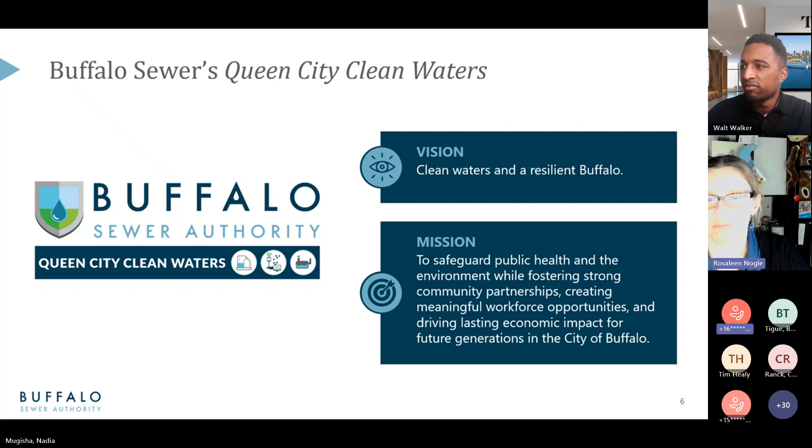Just trying to really state what we're trying to do here, rather than using the very technical term of long-term control plan, which the public does not exactly understand or embrace. And so we're looking at over $1 billion of investment over roughly the next 15 years. Our final project, currently we're looking at a regulatory deadline of December 31st, 2040.

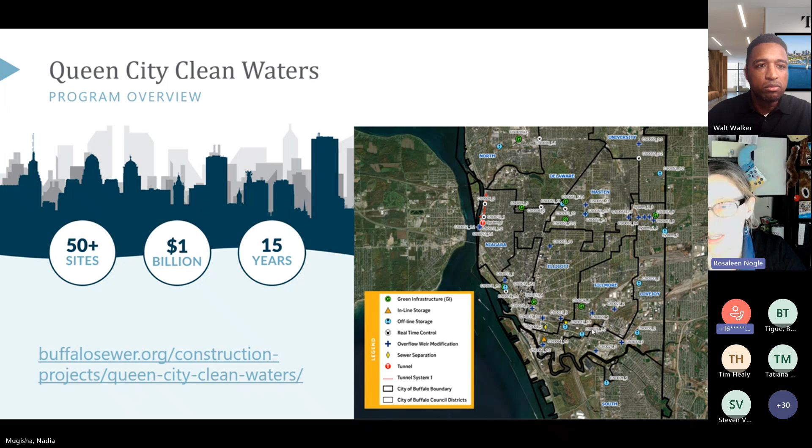And we're looking at a little over 50 sites throughout the city of Buffalo, and that includes 3 projects at the Bird Island Treatment Plant that are currently in various states of construction and design. But as for this presentation today, really what we're looking at is 2 of 10 underground storage facilities. And with that.

Okay. Thank you, Rosie. So now we're going to get into the discussion of the specific items related to scope. First, want to cover just some key dates as it relates to the procurement schedule. So signed and sealed submissions must be received no later than Tuesday, March 4th, before 10 a.m. Those hard copy submissions must be delivered to Rosaleen Nogle at Buffalo Sewer Authority's office at City Hall. This timeline also includes the digital PDF submission of the proposal, and the technical proposal and cost proposal must be delivered for the hard copies in separate sealed envelopes.

Shortly afterwards, interviews with shortlisted consultants will occur, estimated the week of March 24th. Consultant award at the Buffalo Sewer May board meeting will occur. Target notice to proceed is July of 2025.

As these 2 projects, Sidney Lark and Edison Martha, are part of the Queen City Clean Waters long-term control plan, and a hard consent decree schedule, maintaining and getting ahead of the design schedule is of extreme importance. And so the completions of the designs are outlined here for Sidney and Lark, no later than March 19th, 2027, and Edison Martha OLS no later than November 20th. So just to reiterate, these are consent decree projects, and schedule is extremely critical.

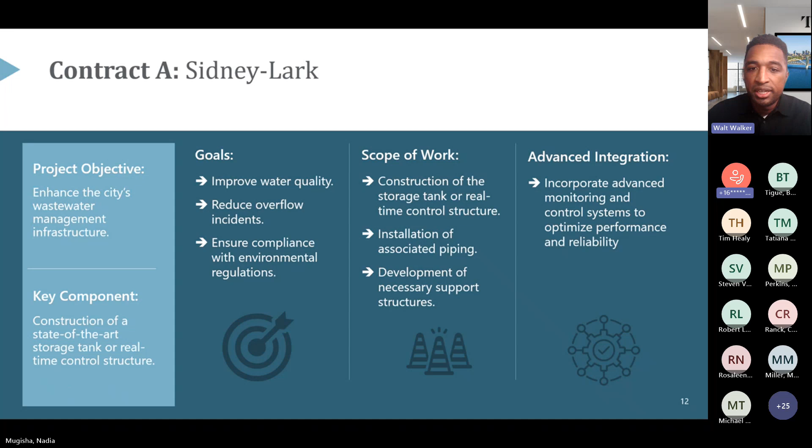And real-time controls technology has been used in projects across the city of Buffalo for Buffalo Sewer over the past decade, many of which are currently under construction. So in the Sidney Lark project overview, I will turn it over to Nick from the program management team. Thanks, Walt. Appreciate that intro. Welcome everybody.

So here I'll go ahead and talk about Sidney Lark OLS, alternative one, and we'll get into why there's multiple alternatives here in a minute. But here you can see the image on the right is of the Sidney Lark project area in blue. You see the outline of the tank there. The footages have changed slightly since this image was created, as well as the tank volumes for the initial PER, as we got into 30% design. We can talk more about that. So yeah, location here, northwest corner of Sidney Street and Lark.

This concrete offline storage tank is going to hold approximately 1 million gallons of sewage volume here. That volume had dropped slightly from the initial PER when we got into 30% and started doing some detailed modeling. You could see the 5 parcels in blue are the city-owned Buffalo properties, and we've also got a couple other properties to the south and east that are owned by the City of Buffalo that we're going to utilize for temporary storage for laydown area there.

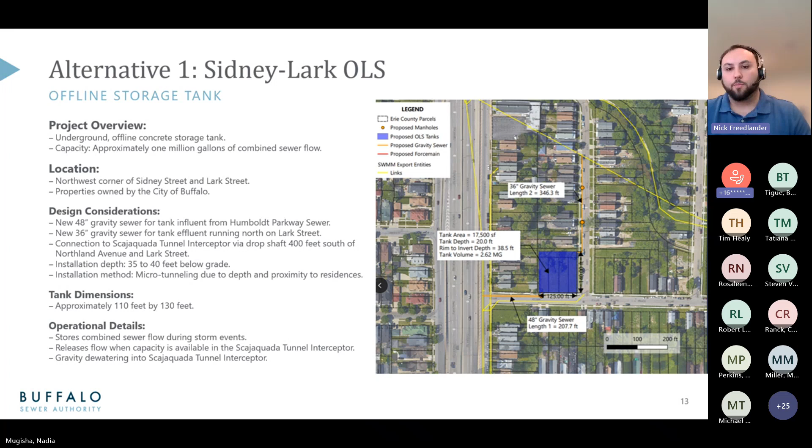You can see the 125 by 140 on the image to the right. When we got into the constructability review, the extents of that were a little too much, so we had to pull back the tank to 110 by 130 and increase the depth there. So just some operational details. This tank will store combined flow during rain events. Once the capacity in the Scajaquada tunnel interceptor is available, there's a gate that will modulate and allow flow to leave the tank. So again, gravity dewatering is extremely important to BSA, and that's what we've prescribed here.

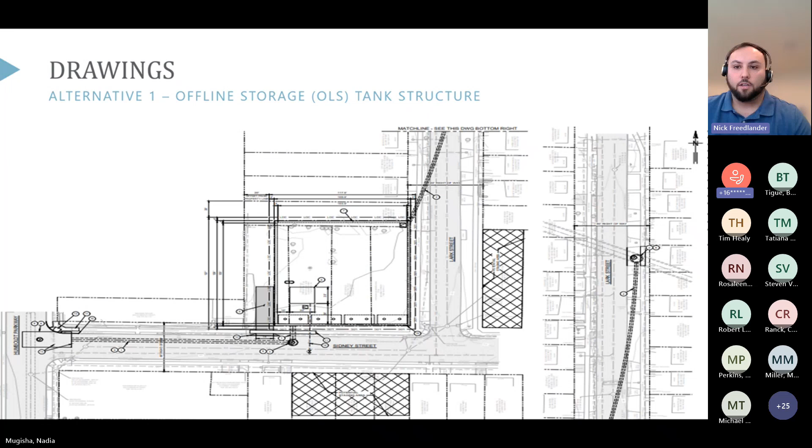So I'm actually going to just go ahead and share my screen in PDF so everyone can see this clearly. So here is the site plan for alternative 1. Here is the diversion chamber. As mentioned, we are getting into the curb and sidewalk a little bit here. So replacement of the sidewalk and curb, as well as pavement restoration along the influent. Here we're going to have a manhole to turn 90 degrees into the tank.

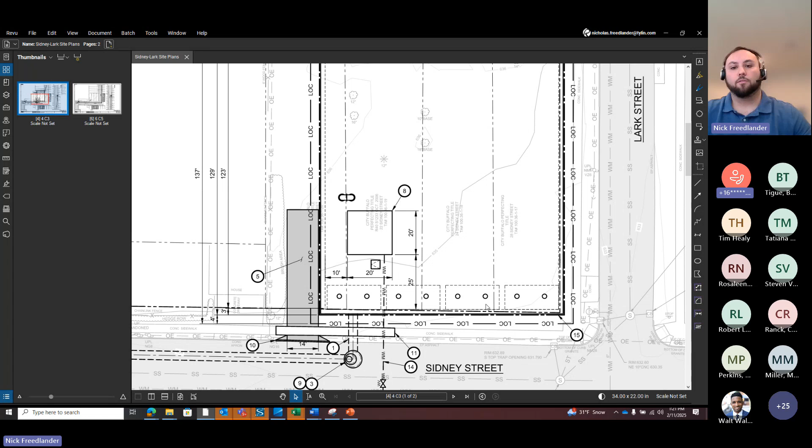An important feature of these tanks is the flushing, the tipping buckets here. So we've got 4 runways with 4 sets of tipping buckets here, where these will also be removable concrete slabs. So you're going to be able to one day, if needed, pull out the tipping buckets for maintenance activities. Here is shown a small utility building that will house the electrical equipment, as well as the water lines to supply the tipping buckets. Here we've shown a temporary access, and here the construction entrance.

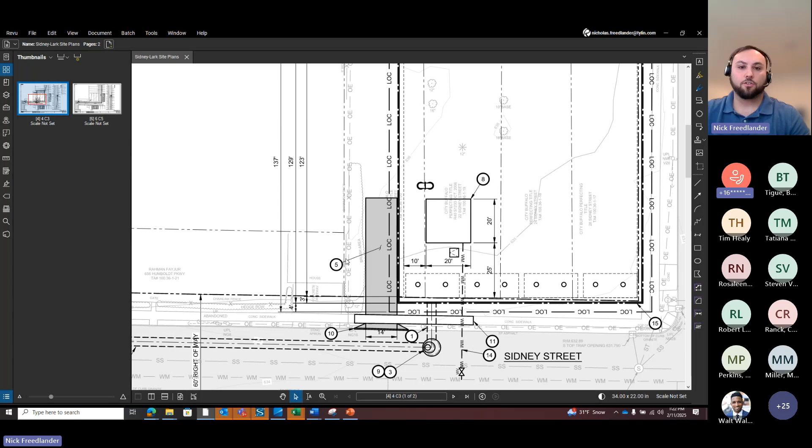And just an important thing to note in this site is we are in the middle of a neighborhood. So as I said before, the extents of the constructability of the tank were definitely top of mind here. There's a small garage structure. In fact, the neighbor up in here has actually been using this lot as a back driveway. So that neighbor might be a little unhappy with us here, but I don't think he's supposed to be using that as a driveway nonetheless.

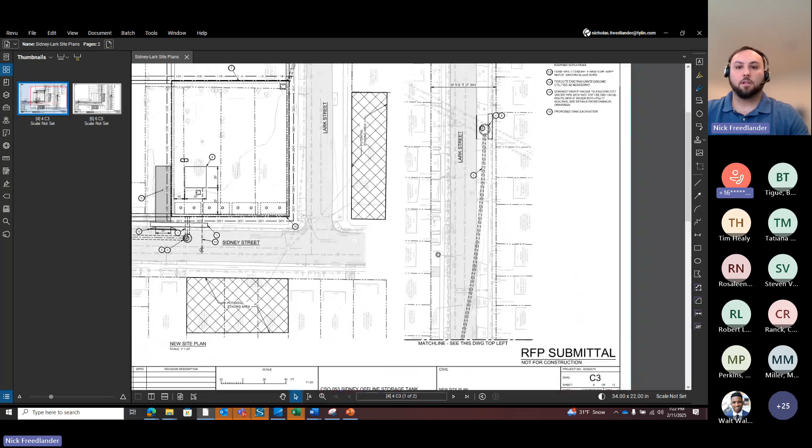And then leaving the tank in the northeast corner here is where we've prescribed the micro tunneling operation, and that comes here about 400 feet to the south of Northland Avenue. And here we've prescribed a vortex style drop shaft to get down to the Scajaquada tunnel interceptor. Nadia, you can take the screen back for the next slide.

So some design considerations. This was essentially an update from the PER to the 30% design. We reduced the volume of the tank from 3.26 million gallons to 0.85 million gallons due to the detailed hydraulic modeling that occurred between the PER and 30% stage. Peak flow rates are 75 million gallons in the 48-inch conduit, and 42 million gallon capacity out of the effluent 36-inch line. The tank dimensions optimized here are exactly 123 by 103.5.

Obviously this would need to be looked at as detailed design progresses. The tipping bucket design, we've got 4 tipping buckets as I discussed, each with the capacity of 1,460 gallons. And these buckets have been coordinated with the manufacturers to ensure that there would be adequate flushing in the flushways.

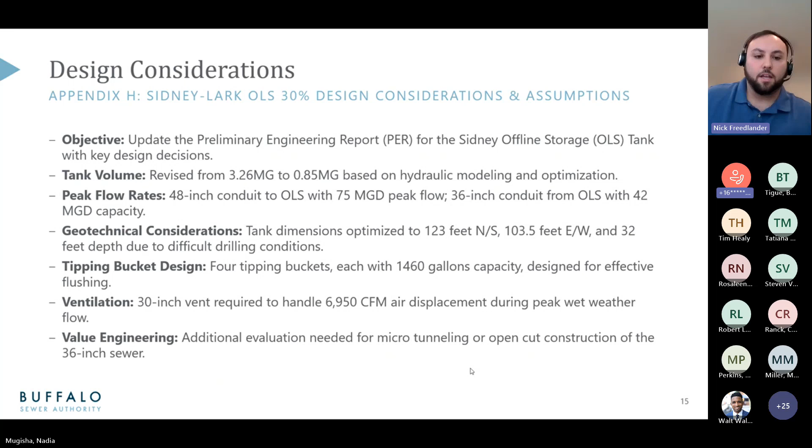Ventilation is definitely top of mind for BSA on this project, considering the proximity to the neighbors, the residents here in this neighborhood. So we're looking at a 30-inch vent to handle about 7,000 CFM of air displacement during peak wet weather. And obviously that would need to be looked at further as detailed design progressed. And then value engineering, any additional evaluation for micro tunneling versus open cut of the 36-inch sewer would be necessary once the detailed design is finalized and we know how deep we're actually going here.

So you can move to the next slide. So moving into alternative 2. As I discussed, there was an effort to update the modeling, rerun some scenarios, and that's how we came down to our about 1 million gallon storage volume for the OLS structure. And during this evaluation,

essentially on the 5th largest storm of the year, this structure was only being used as a pass-through, as an interconnect. So we kind of took a step back and said, hey, do we really need to build this massive tank if the 5th largest event is really not storing much of any volume? It's just using it as an interconnection. There may not be a need for a tank. So we created alternative 2, looking at a real-time control structure.

So this alternative would include the diversion chamber as previously discussed. However, the modulating gate that was within the OLS structure will now be placed in that diversion chamber, and that will act as our real-time control structure. And coordination with SCADA and remote monitoring will be required there. So the location is the same.

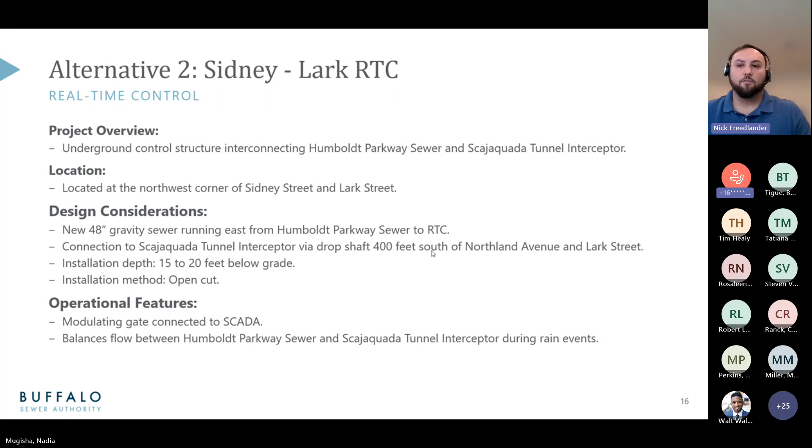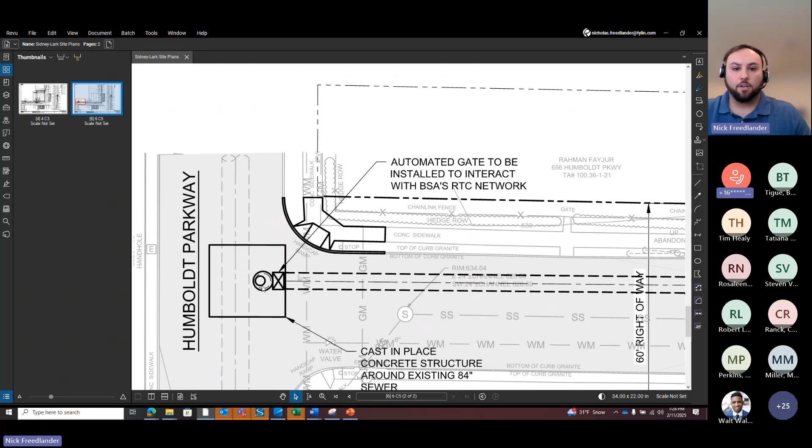And again, I'll just steal the screen so everyone can see this clearly. So here's alternative 2 site plan. Again, very similar to alternative 1. We're having the diversion chamber here with our new modulating gate that will be connected to SCADA. And then our 48-inch sewer will, instead of taking a 90 here in Sidney, be coming to the intersection of Sidney and Lark and running north to that drop shaft structure.

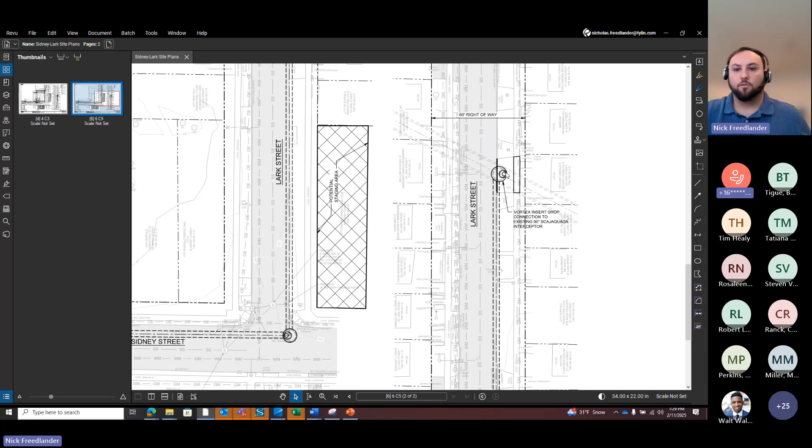Here's that small control panel that I mentioned previously. Here again, no building required, just a small outdoor panel there. Same open cut installation here on this side and back to the vortex style drop shaft here.

So one thing really to consider here is we got an extension for our regulatory date based on some of these changes. So we are developing the 30% submittal for alternative 2. We wanted to provide something for the proposers to take a look at to get an idea of what we were thinking for alternative 2. But we are progressing with updating our 30% design to show alternative 2, the more detailed drawings as you'll find for alternative 1 provided in the RFP.

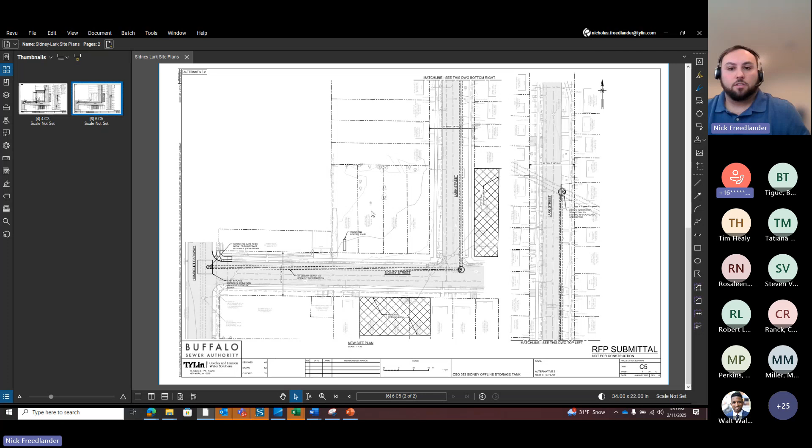We are coordinating with DEC to update the PER and provide the updated information and answer their questions as it relates to alternative 2. So essentially, this is why we are still showing 2 alternatives versus just saying, hey, just the RTC. We still need to confirm that the regulators are in agreement with this alternative as we progress and update the PER. And all of this information will be shared ultimately with the awarded consultant for negotiations. Nadia, you can steal the screen back and move on to the next slide.

So here's a project schedule. As the RFP currently stands, these dates are a little different from the RFP. You can see the big one here is the March 2027 final construction documents. The schedules for Edison, Martha, and Sidney were very similar before we began negotiations with alternative 2 with DEC. So we'd certainly love to share that timeline, that extension, with the ultimately awarded consultant to provide documents about 4 months later than Edison Martha, here on the 19th of March.

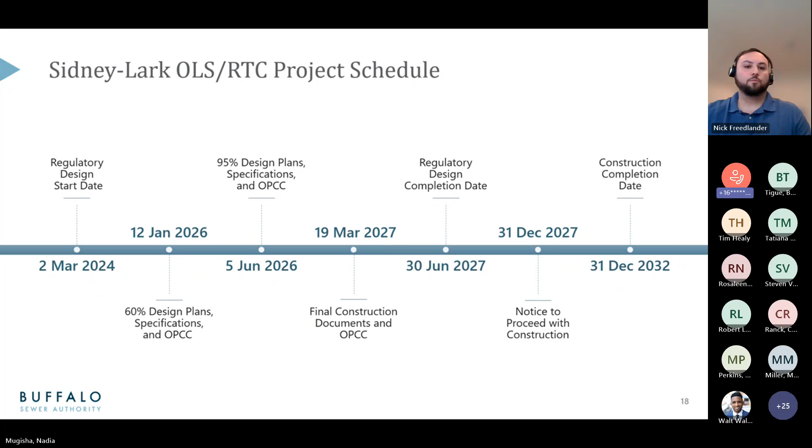And just important to note that the regulatory date is June 30th, 2027, with the notice to proceed for construction in December 2027, and then ultimately a construction complete date by December 31st, 2032. That's it for Sidney. Steve, you can go ahead and take over for Edison Martha.

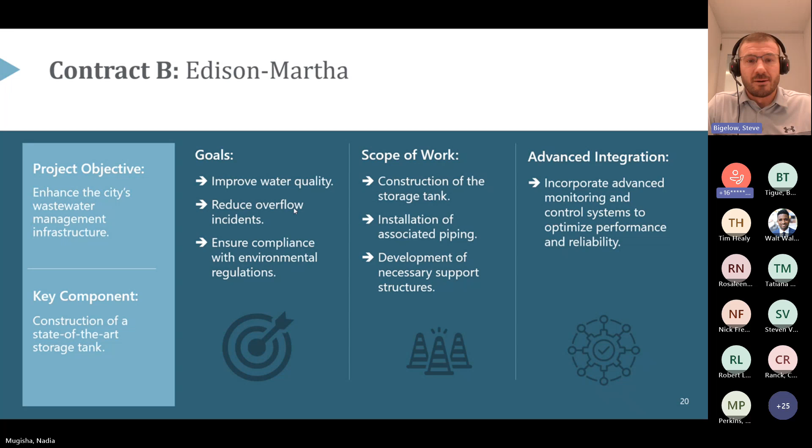Yeah, thanks, Nick. I think a lot of the OLS tank items that Nick has talked about are pretty repetitive between Edison and Martha. I think maybe the primary one being gravity in, gravity out. I think laying out this design without a pump station was a goal from the get-go, and I think from the Sewer Authority for long-term O&M.

For Edison Martha, we have a 48-inch gravity inlet sewer coming off the Scajaquada Interceptor and Edison Avenue, gravity into the site through the parking lot there of the charter school, a 2.61 million gallon offline storage tank in the eastern portion of the park, 8-foot depth, and then a 24-inch gravity sewer on the effluent side back to Edison Avenue.

The design considerations, I think, for this, from a high level, are minimizing the footprint there in the park, but also gravity in, gravity out. We've had some ongoing coordination with the Sewer Authority. I think we'll get to later in the slide deck some of those design considerations to minimize the impact of nearby facilities, below grade access points, and then specifically, as I move on, what the Parks Department has communicated to us.

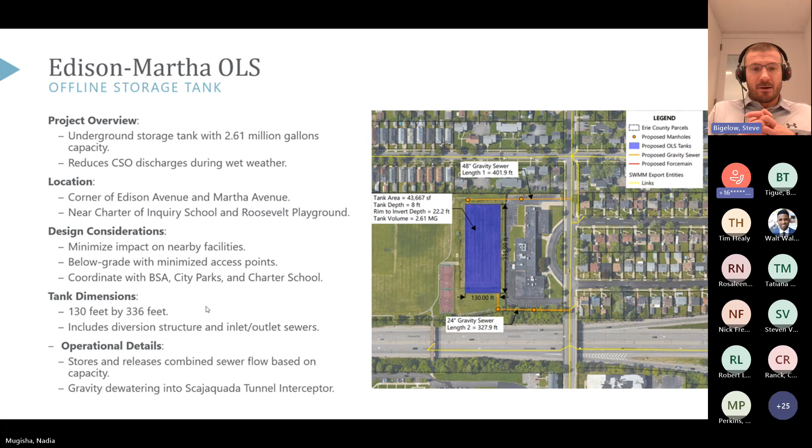I think maybe we moved on. I think actually, Nadia, I might take over and share, similarly as Nick did with the drawing package, to just communicate this a little bit since we've been working on it with the Parks Department. Access drive we have shown off of the school parking lot. Our diversion structures in Edison Avenue. And then what we've been working on with the Parks Department and what you're seeing here from a high level overview is their conceptual plan that they are working on for Roosevelt Park improvements.

A lot of what we've been doing for the Edison Martha OLS tank is minimizing above ground features in the park. So where our design started was a multi-cell OLS tank to try to minimize parts of the basin being activated. We had some hatches in the open field. The community feedback has been that they would like that to be open, no hatches, aligning any hatches we have with pathways or access drives. So a lot of our coordination for the last few months has been trying to get the design to a point where we're adhering to what we're hearing from the parks.

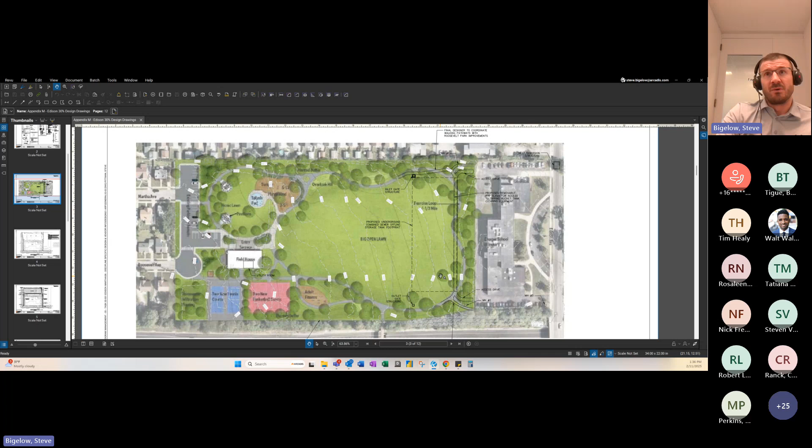I think that's all I have, Nadia. I can let you take over sharing again. Maybe go to design considerations.

Thanks. Yes, the objective, I think, is fairly straightforward as we're on the call. We have submitted our PER responses to the DEC, so that process is well underway. The main differences between Sidney Lark and Edison Martha is really coordination with the parks and the charter school. The parks has Roosevelt Park upgrades slated for this year and next year that we're working around to minimize our footprint on what they build.

And then the charter school really, once the park upgrades are completed, will be utilized for getting the effluent lines through their parking lots and also for haul roads. So there'll be some logistics there to work out with the charter school. Storage tank, 130 feet by 336. Screening was deemed unnecessary earlier on in the process. Tipping buckets for cleaning, as I said. We've been collaborating with Grande on those.

I think there's a memo in the RFP for flushing for what we've been working on with the sewer authority, as well as the geotechnical report. There's some rock in the area. We're anticipating rock excavation, but nothing too terrible, I don't think. It's actually better than we initially thought from the soil borings.

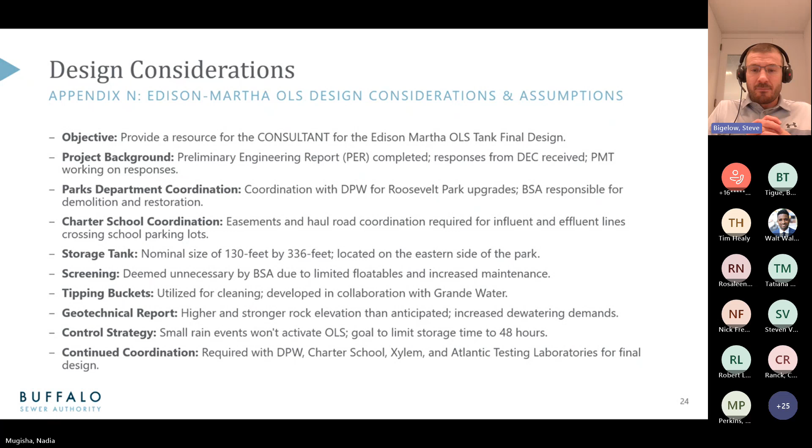On the control side, the plan is that the diversion structure will have a weir that will not activate the OLS tank in small rain events. And then as rain events increase, the OLS tank will get activated. And then a control strategy for the flushing gates and levels set to operate. And then again, continued coordination with the Parks Department and the school. I think maybe through some of the RFP and PER that Xylem had developed the previous version of the long-term control plan that we've been working off of.

Thanks, Nadia. From a schedule standpoint, similar to Sidney Lark, we had start of design March of 2024. However, now a little bit decoupled in the fact that our final design for the consent decree is late 2026, as opposed to early in 2027, with the notice to proceed to construction following in June of 2027. So the late 2026 date and mid 2027 date for design and getting the contractor on board are probably what we see as the critical path for the schedule.

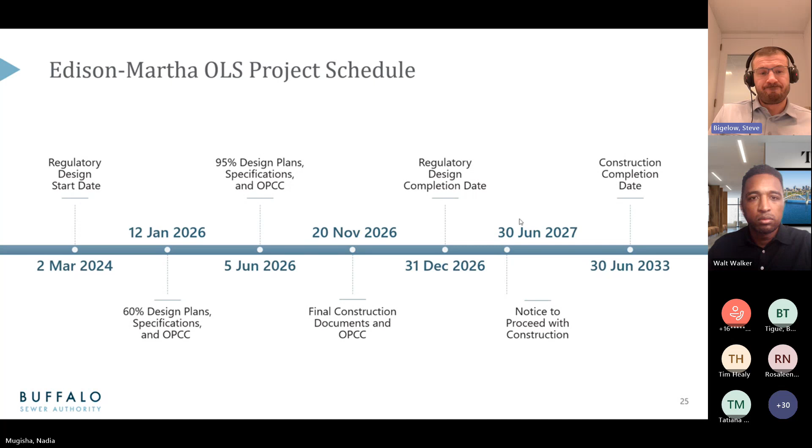And then there's, I think, from our initial take at it, some decent time between notice to proceed to construction and the final consent decree of 2033. So I think that's all for Edison Martha. Thanks, Nadia. Thanks, Steve.

All right, so Nadia and I are going to talk briefly about some unique contractual requirements that we want folks to pay attention to. The first thing up is the Community Partnership Program. So some background on that. Through Queen City Clean Waters, Buffalo Sewer is spending millions of dollars each year building and maintaining the infrastructure to provide wastewater treatment, manage CSOs, and protect public health. So the purpose of Buffalo Sewer's new community benefits program, titled the Community Partnership Program, is to leverage those economic and social impacts Buffalo Sewer has in the community with large-scale construction projects, as well as professional services and engineering contracts such as this one.

And this will be done by creating an avenue for community partnerships to form with consultants and contractors of Buffalo Sewer. So the Community Partnership Program is designed to deliver long-lasting, positive economic, environmental, and social impacts in Buffalo Sewer's service area under four primary categories. One, economic development. Two, education. Three, public and environmental health. And four, workforce development. In regards to partnerships, beneficiaries may include a nonprofit organization that has established and maintains valid nonprofit status under the Internal Revenue Code, Section 501(c)(3), along with all applicable rules and regulations, and in addition, public schools and colleges in Buffalo Sewer Authority's service area.

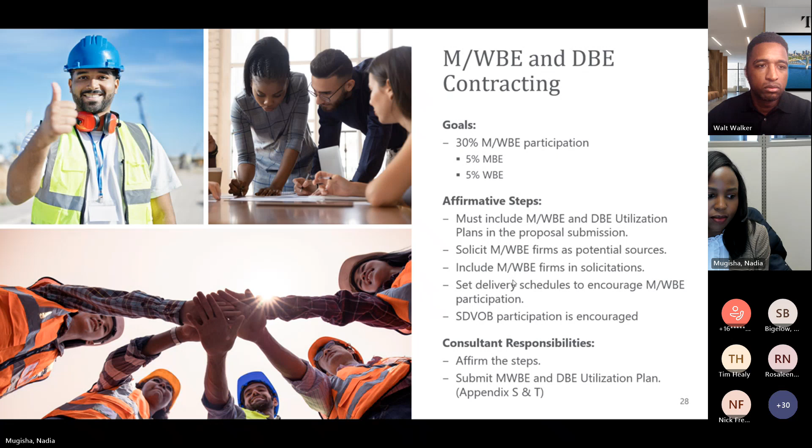Another consideration is managing flow efficiently so that we reduce debris accumulation. Some of the considerations include incorporating cunettes to direct flow and prevent sediment accumulation, and using tapered and/or rounded corners where possible to minimize areas where debris can settle.

Air management and odor control: since these projects will be either in parks or urban areas, proper odor control is very essential, not only to comply with environmental standards, but also for a positive experience for surrounding communities. Additionally, these projects have confined spaces, so proper ventilation is going to be critical for worker safety, system efficiency, and also longevity of equipment inside the tanks.

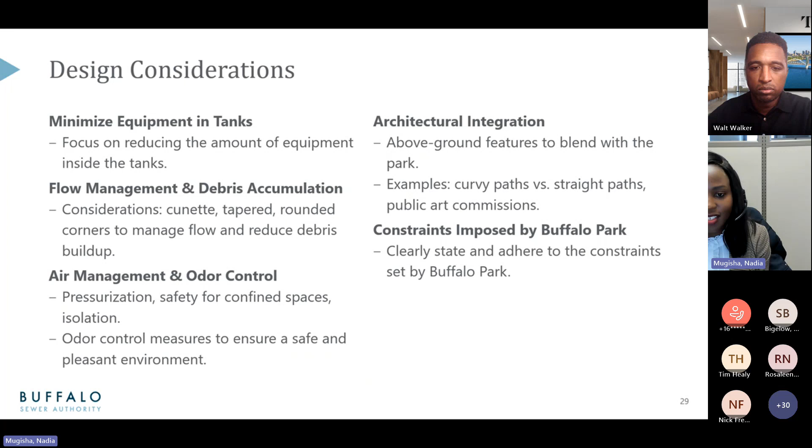So in closing, just some key reminders. Make sure that you read the proposal properly and review the RFP. Review the RFP format and make sure that the outline is followed when you put together your proposal. Review the evaluation criteria, that's going to be important. Another key reminder is the project schedule. As everyone mentioned in the presentation, these are consent decree projects, so timely delivery is critical. If there are opportunities to accelerate the timeline, that would be highly valued.

For cost proposal submission, when filling out the cost proposal, clearly indicate whether you're proposing for one project or both. Regardless of the selection, there will be a single technical proposal for both projects. However, the cost proposal and the technical proposal must be submitted in two separate sealed envelopes. And obviously, this would also be included in the addendum that will be issued.